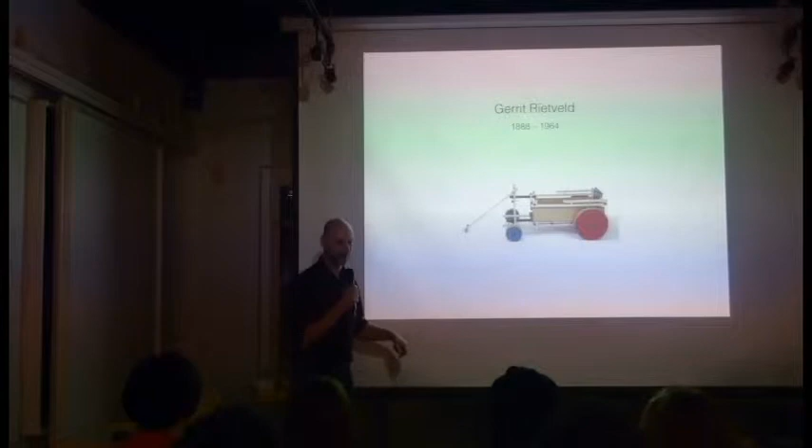If you know something about forces and vector diagrams, there's a lot of force going in the upper direction instead of the forward direction. That's why all the old-fashioned designs are heavier to tow.

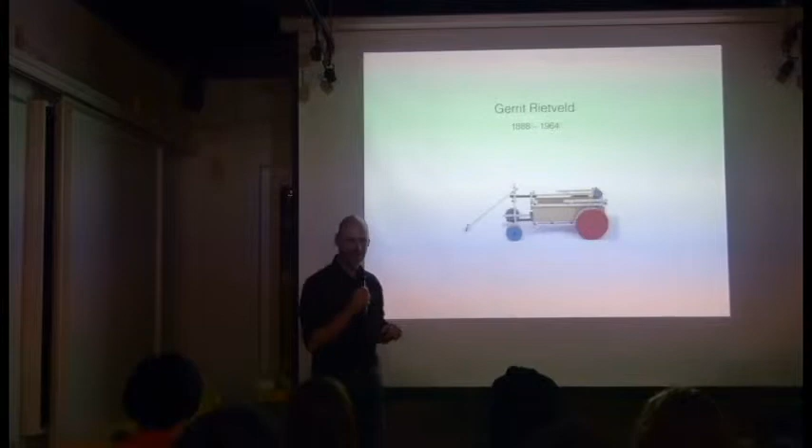This one actually looks more clumsy, but it's actually easier to tow. So I took that as a starting point.

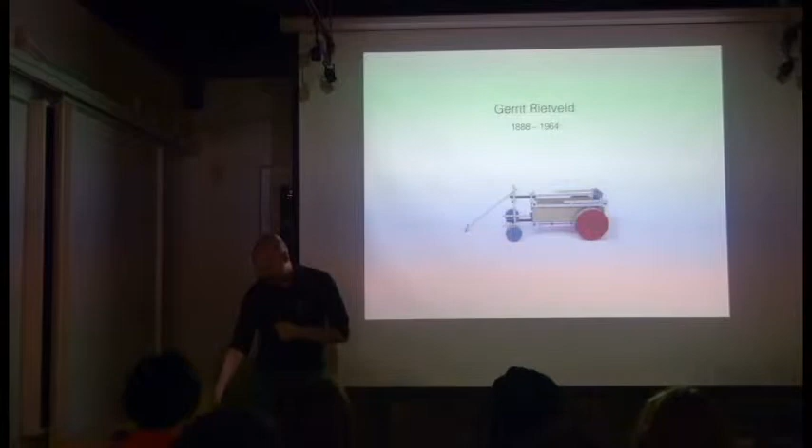But because all these designs have a very solid build, they are solidly built, made from wood. And the next thing after you see a product that's very solid, it has to become flexible.

So my challenge was, how can I create something that is flexible? Because that is lighter, you can fold it. All these disadvantages of these kind of wooden carts, I added them up—it's heavy to tow, very heavy in weight, it's bulky, it occupies a lot of space, all these kinds of things.

I took that as a challenge to change them, because a lot of people have some kind of love-hate relationship with these kinds of products. They feel the pressure to buy these things when they have small kids, because at some point these kids are too small for a bike and too big for a stroller. So they would like to have a day out, and instead of carrying them around, they put them in such a wagon.

So having it foldable would be welcome, because most people travel by car instead of going somewhere just by foot. So somehow it should be foldable, and that's a different challenge than just making something similar with the same characteristics. So I picked up the challenge to make it flexible.

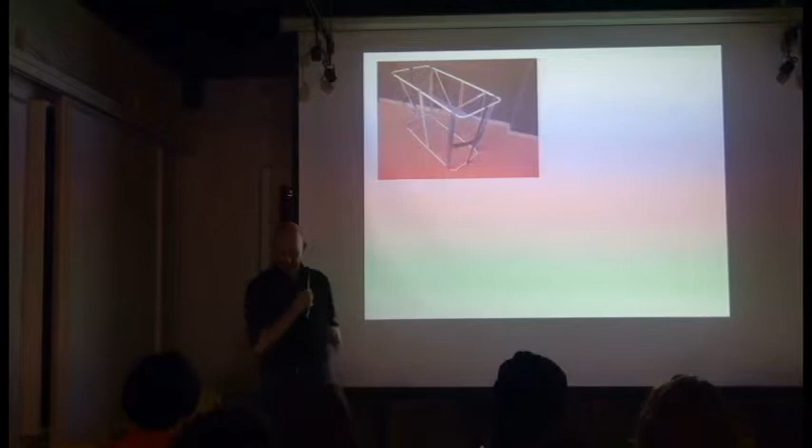I took that as a starting point, but because there is nothing available which has this kind of shape, this kind of size, I was just trying to figure it out with some duct tape and some tubing to find a way—does it work or not? And painfully, no, it didn't work. So I had to do another one.

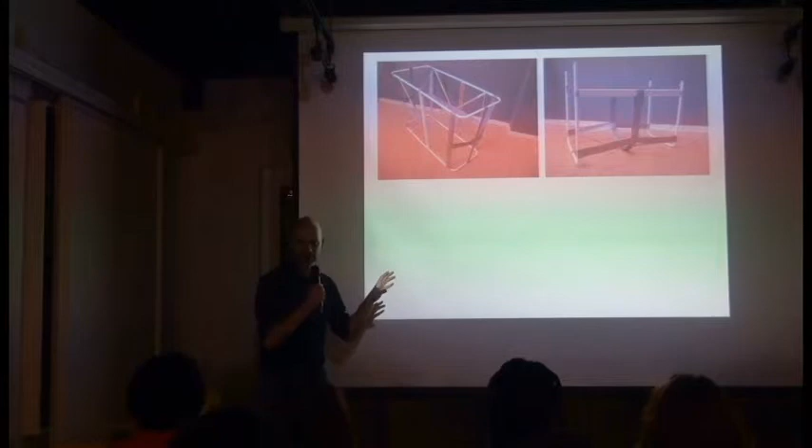I cheated a little bit here. But it should work, because there are some devices which I couldn't find back on Google, but it was in my mother's kitchen drawer.

There's the kitchen again. And there was some kind of—what's the English word for it—colander, which was foldable, and it has that kind of principle: it's a metal weave on the outside, and on the inside there's some kind of mechanism that you push inward so that the outside becomes strong. And that was really interesting—that was actually the starting point.

But there is no picture of it on Google. That's amazing, actually.

So the next thing was, okay, I couldn't get it done just by mimicking it in an easy way. So I had to make a big investment, buy some tubing and create something with rapid prototyping, so it starts the first shape that I had in mind.

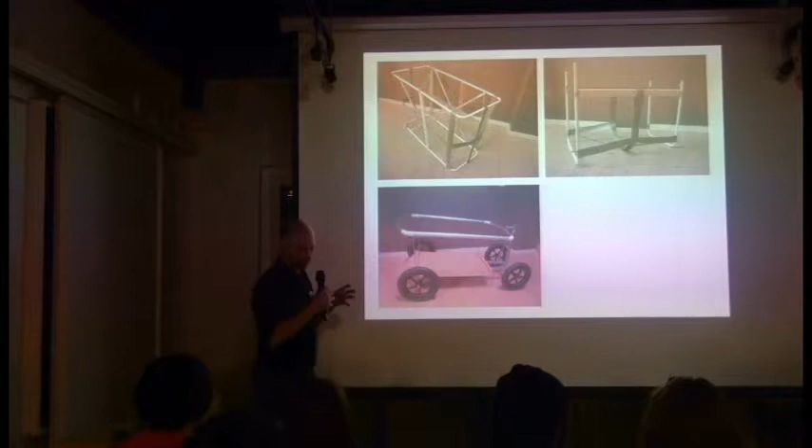There's a lot of PVC tubing here to mimic the shape and to see how the product evolves into a more mature shape.

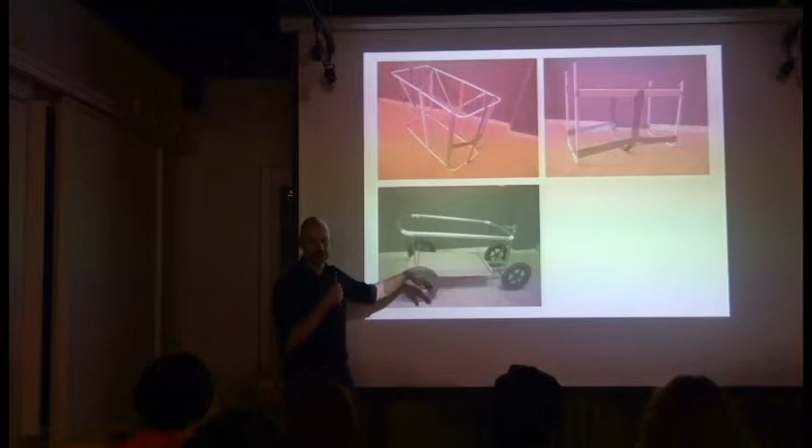So the idea was some kind of chassis, a circular frame on top, and in between, well, something should be happening here. But at that time, I failed in the easy way.

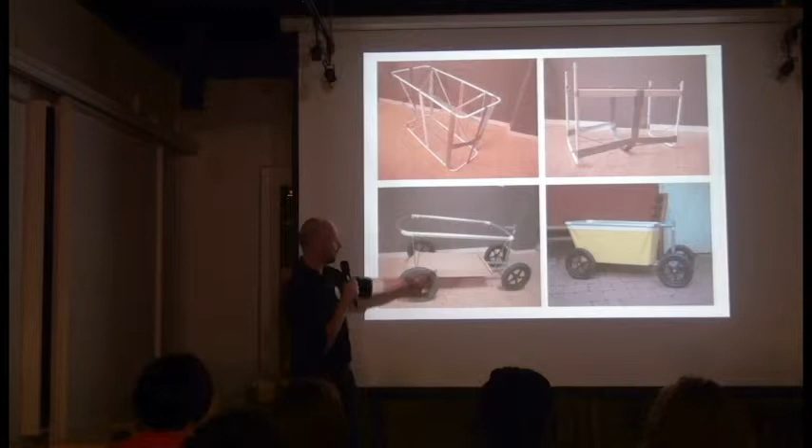So I contacted a small firm, and they made a piece, a flexible tub from tarpaulin. And although there was a lot of wrinkling and such, it was pretty promising, because I could demonstrate that if you put this upwards and put some tension on the cloth, it really becomes solid.

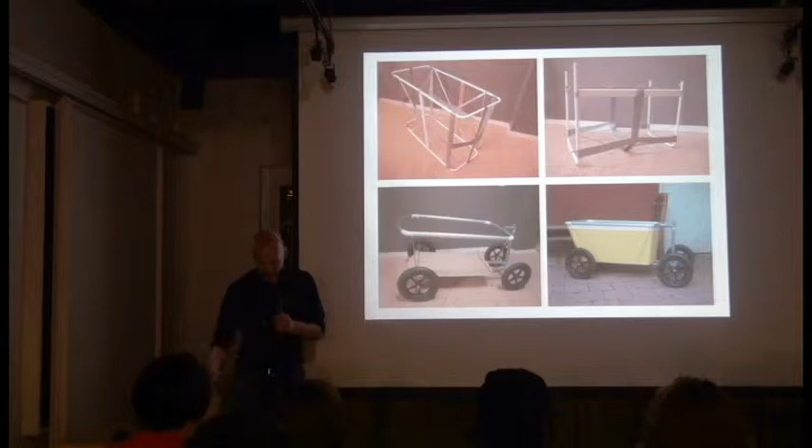So from here, I started investing more in rapid prototyping. These are just four corners. On the top side, you see all the white stuff that's made from SLS technology, giving more detail to the product.

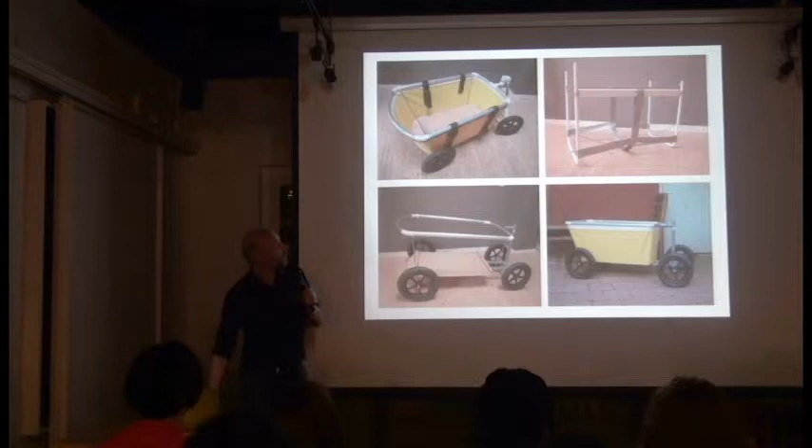Also, a different kind of system had to be tested because it should be foldable, and this is still rigid. So I had to prove to myself that it can be folded into a flat package, because in the back of my mind it should be carried around by car first, then you take it out, pop it up, and make your walk.

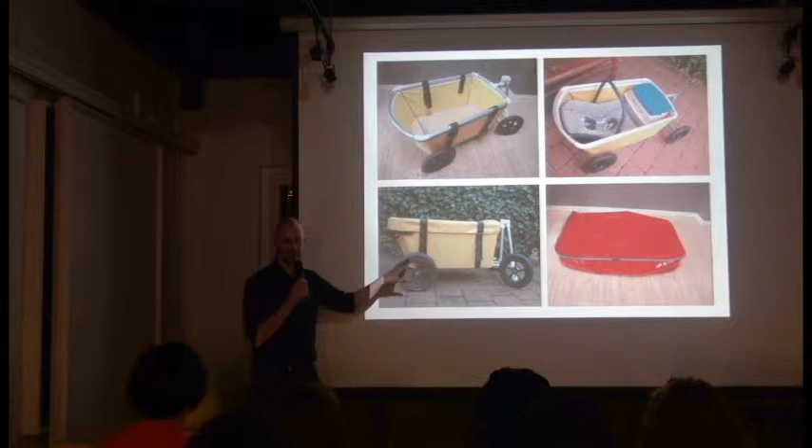So in the end, this was my first final prototype. I discovered I had to do a complete investment to make everything as real as possible. I couldn't mimic it anymore because the problem was a little bit too complex at that time.

And yeah, I think I succeeded in some way because that was the next step. This was my first prototype, and I said, okay, I think we're pretty close to a final design, let's make a final or make a new prototype, which is the red one.

And yes, it was foldable. Not in the most fashionable way, but yes, it was foldable. There were a lot of difficult solutions I created, but still the basic principle was there. I could make it foldable. It's easy towable. The upper side, the starting point, is still there. It has 4 wheels which keep on the corners, not moving underneath the chassis, so that it doesn't tip over at a certain point. Everything should be solved because I would like to have a decent towable cart.

But it was far too complex. It cost me a fortune, and I had to redo it all again. The basic principle of this foldable piece is that the bottom plate was divided into 4 pieces, and by a loop I could pull it up, and everything collapses down. But there was too much wrinkling, and the strength was not secure up top. So I had to redesign the whole structure.

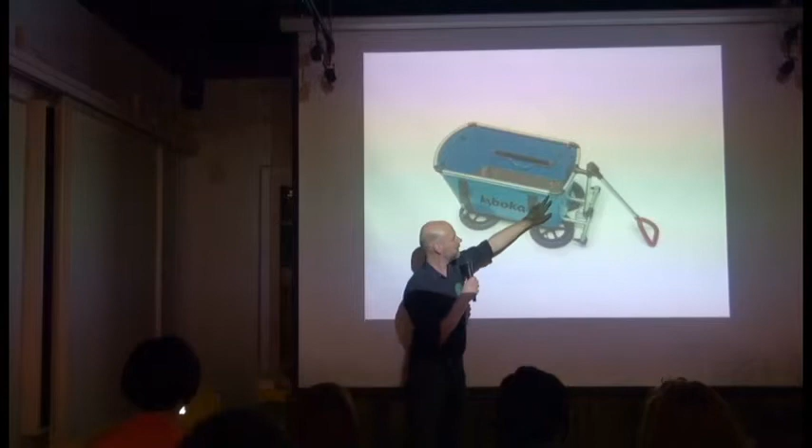These are also rapid prototypes in this piece. And the idea was, what you see packed in the bag, when you pop it up, everything is in here. So the bag could be split up in two, so that you have more convenient bag sizes. Still they're quite bulky, but it's more convenient, and you can use them to pack more stuff in there.

And in the end, what's in the bag was actually the cart. And this is actually, well, hopefully the future habitat of this cart - having this place on the beach or anywhere out there in the outdoor.

And the reason why I'm here is there was very little opportunity to get it produced. I spent years trying to get some funding, find investors, find manufacturers, but at some point they were not very convinced that this would be the biggest next thing. Most investors are interested in electronics, at least in the area of Eindhoven. This kind of product is not very fashionable for investors, so they are looking for investments in websites, electronics, smart devices and such.

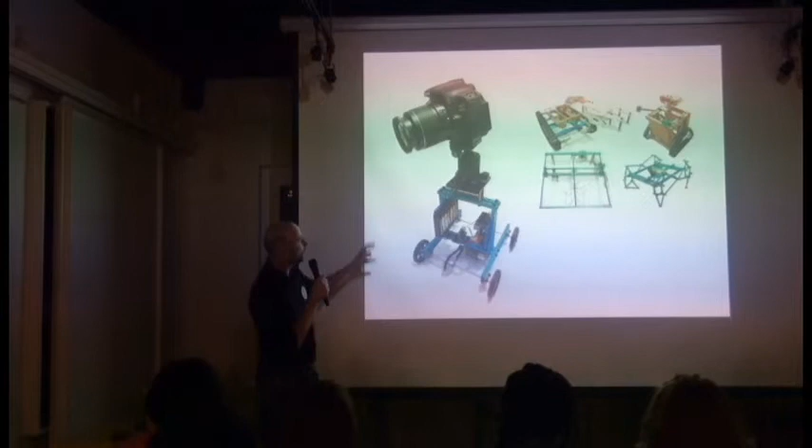So if you'd like to have a stand for a camera, you can build it yourself, or even this is a robot. Sugru is more kind of plastic that you can sculpt yourself such that you can make any adapter you want, to repair things or make them more ergonomic, or for any purpose you think is fun. I think this is Sugru as well, is it? Yep.

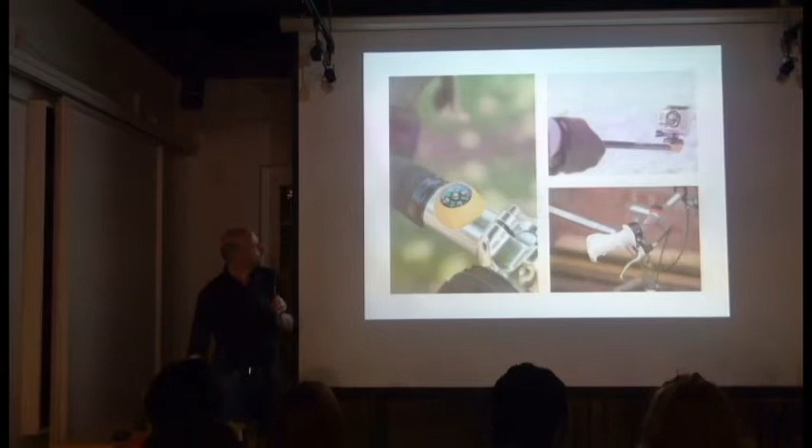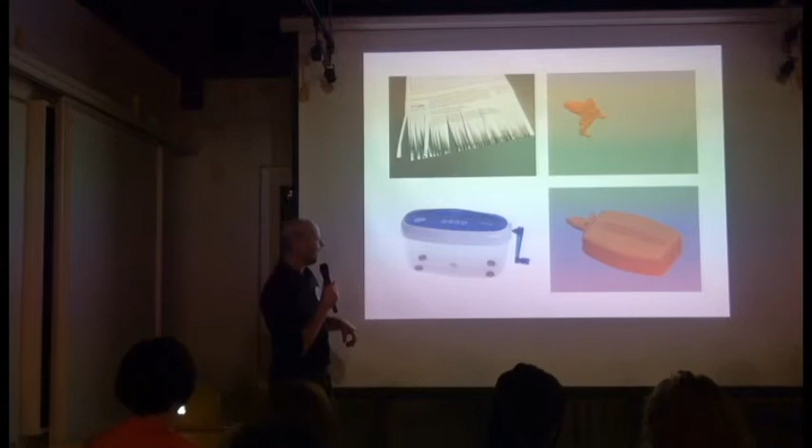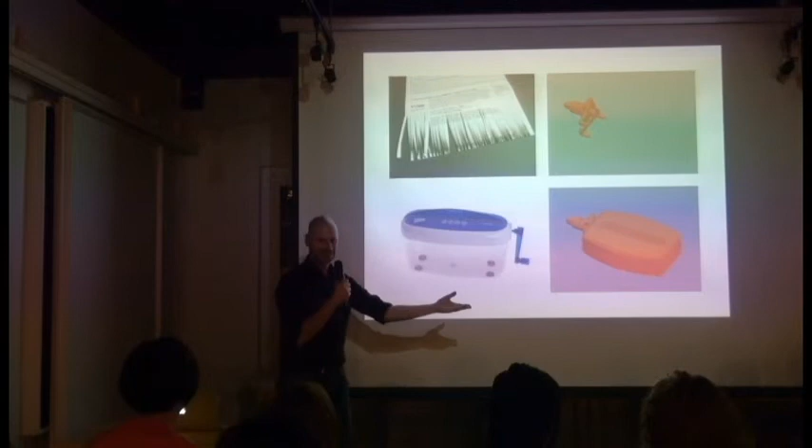So can we make use of that particular feature of this device? We came up with the idea to combine different kinds of products, the very cheap ones you can buy at Hans Table here in Taiwan. For a couple of bucks you can buy this kind of device, which is very eco-friendly because it's man-powered. But if you combine that with the energy loss of the KitchenAid, maybe we can create something new.

But before you can combine these two, you need some kind of interface, and maybe that's the kind of interaction design we did—to make a device that always fits into the KitchenAid, but specifically made to put on the front side, so that you can take off the shaft and make use of the mechanical power of the KitchenAid.

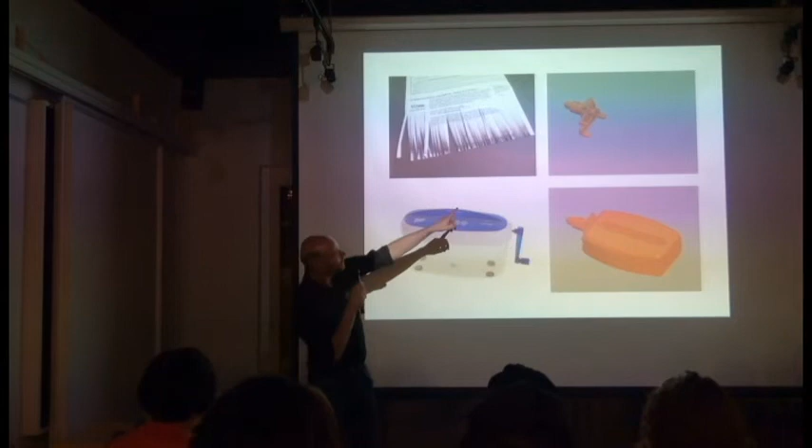So this is that point—that's the adapter I created for one of the paper shredders I bought at Hans Table, which is just a small plastic paper shredder. But also the apple peeler—I created a new adapter for the apple peeler to carry this device and put it in front of the kitchen machine.

And the common piece is actually this part, because rapid prototyping is not only nice for creating very complex things, but it's also an opportunity to combine different elements in one piece. So when you take it out of the machine, you can create something rotating inside another shape, and that principle is used here. The shaft and the housing are done in one go, so I don't have to do any assembly afterwards—it comes out ready-made, just plug and play.

And the tolerances nowadays are very, very small—just tenths of millimeters of space, more on the mechanical side again, my background. So it runs quite neatly—there isn't a lot of vibration because of the accuracy of the machines today.